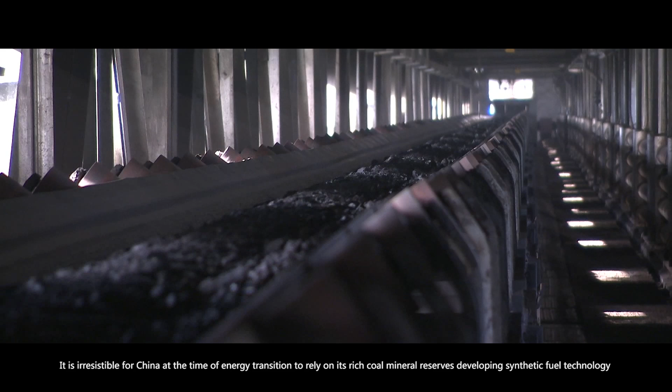It is irresistible for China, at the time of energy transition, to rely on its rich coal mineral reserves, developing synthetic fuel technology which utilizes carbon resources like coal or biomass as raw material and then transfers them to replace oil products and chemicals.

Let's trace back to former times. It has been more than 90 years since the invention of Fischer-Tropsch synthesis in 1923.

Large oil companies in the world have been competing in research on making fuels through coal, natural gas, and biomass to secure places in the international synthetic fuel market in the next 50 years or more.

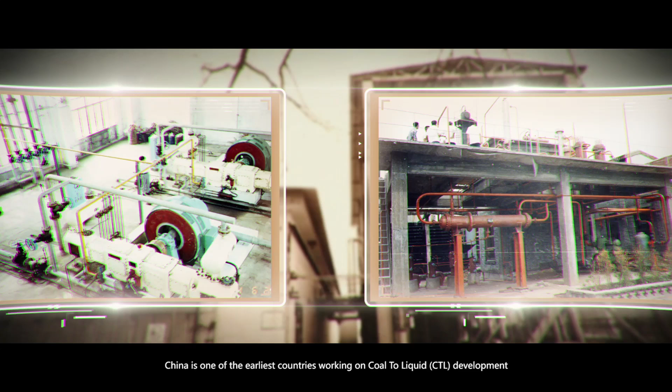With more reserves in coal resources than gas and oil resources, China is one of the earliest countries working on coal-to-liquid development.

However, the CTL has been through a long and hard road due to wars, economy, energy strategy considerations, etc.

How time flies - China ushers in a new century with an energetic rise and growing need for energy. As environmental deterioration increasingly grows in recent years, it is a trend to use coal resources efficiently and eco-friendly.

Confronted with the complicated global energy situation in 2006, China Academy of Sciences, Yitai Group, and 5 other energy companies jointly founded Synfuels China.

It unfolded a new chapter of system innovation of CTL and offered strong support for China's economy and energy security. Synfuels China has become a burgeoning power with proprietary intellectual property in the international CTL field.

Technology is the base, while teamwork is the source of strength. Since the beginning of its establishment, Synfuels China has prioritized technical team building in its strategic development.

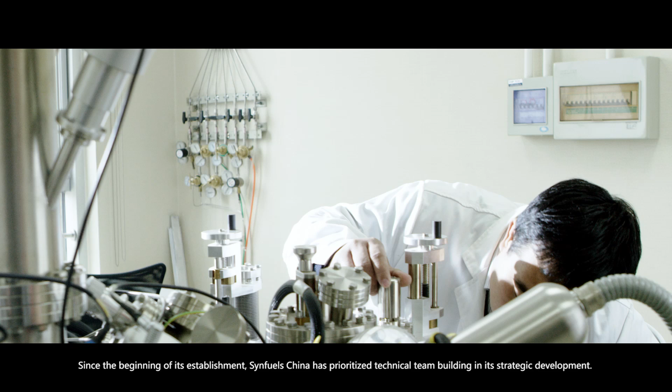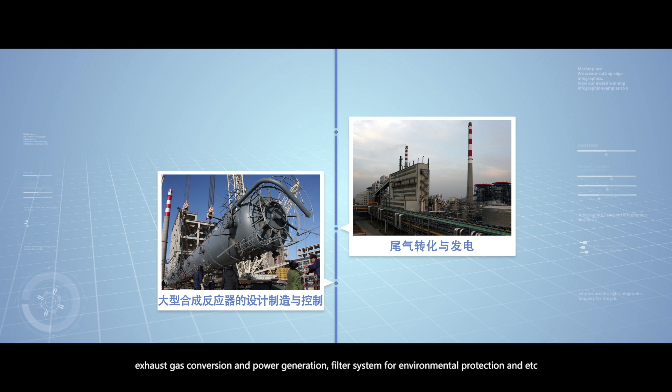Now it has set up a research and development center, which brings more energy to its growth. Indirect coal-to-liquid is a complex and systematic process involving gasification, cleansing, Fischer-Tropsch synthesis, oil processing, and design and control of large-scale synthesis reactors.

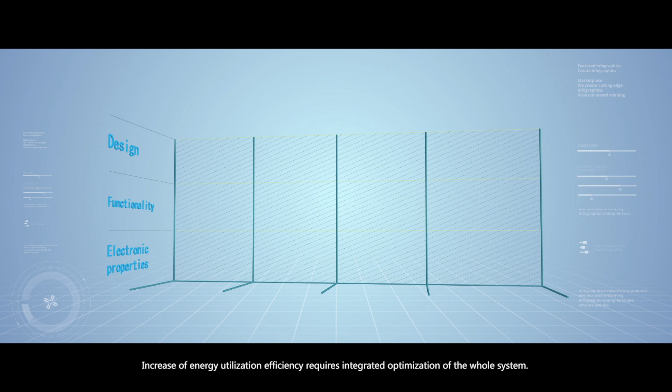It also involves exhaust gas conversion and power generation, filter systems for environmental protection, and etc. Increase of energy utilization efficiency requires integrated optimization of the whole system.

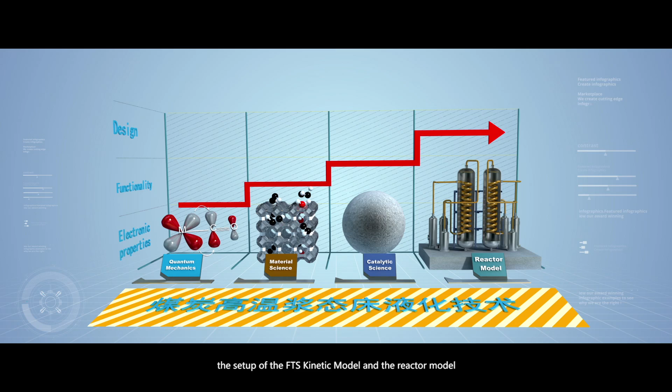It relies on development of high-performance industrial catalysts and knowledge of reaction mechanisms, the setup of the FTS kinetic model and reactor model, as well as the build-up of process simulation software and innovation of synthetic techniques.

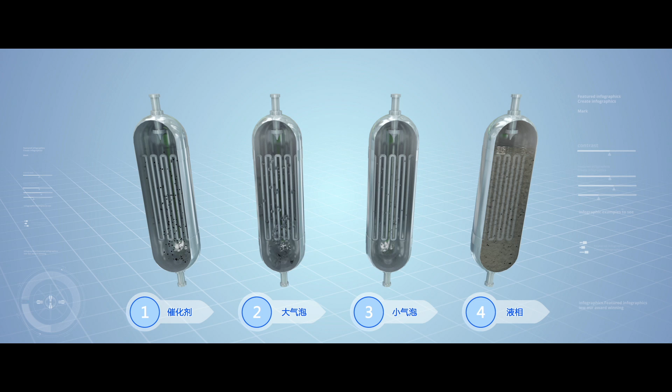First, at the atomic level, using quantum mechanics provides the essential fundamental knowledge for Fischer-Tropsch synthesis and catalytic reaction mechanisms. It predicts and explains the catalyzing process, providing theoretical support.

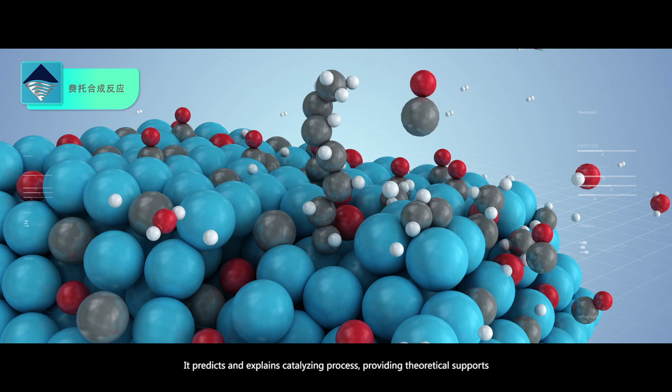Second, make breakthroughs on catalysts for Fischer-Tropsch synthesis, from deep understanding of the structure of the active phase and reaction mechanism, to design more efficient, more active, and highly selective industrial catalysts with longer life cycles.

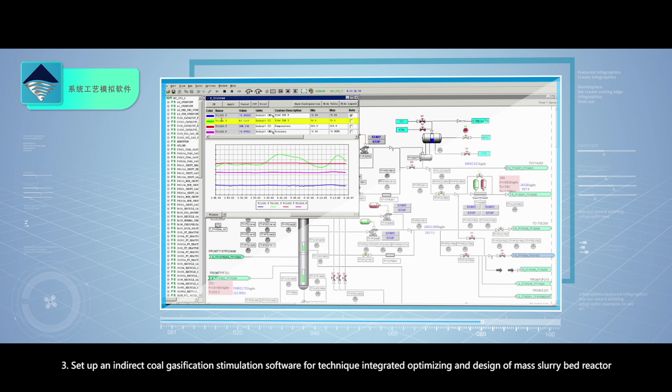Third, set up an indirect coal gasification simulation software for technique-integrated optimizing and design of a mass slurry bed reactor.

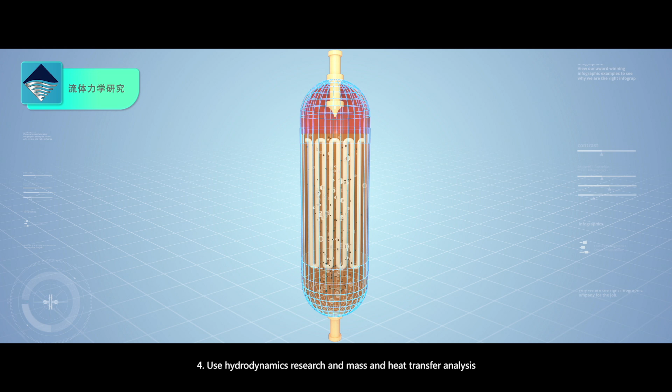Fourth, use hydrodynamics research and mass and heat transfer analysis together with the particle characteristics and anti-wear properties of synthetic catalysts to provide theoretical and statistical support.

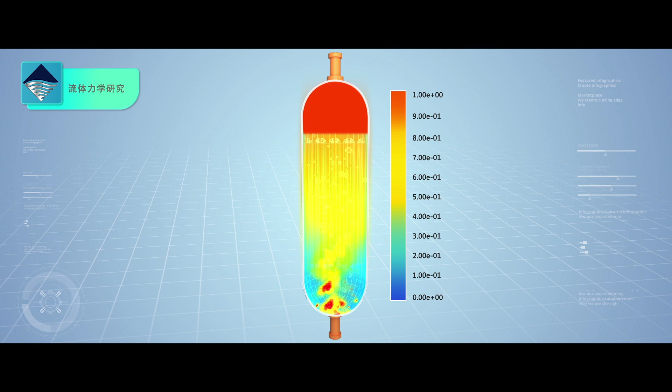Fifth, develop new techniques of catalyst, clean gasoline, fuel, aviation kerosene, lube oil, and high-value chemicals to meet needs of producing plural and high-valuable oil and chemicals.

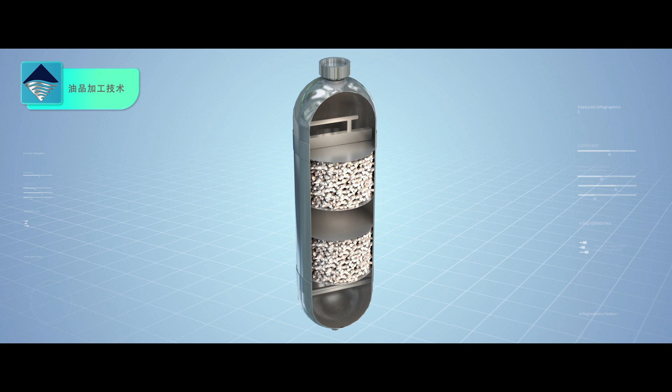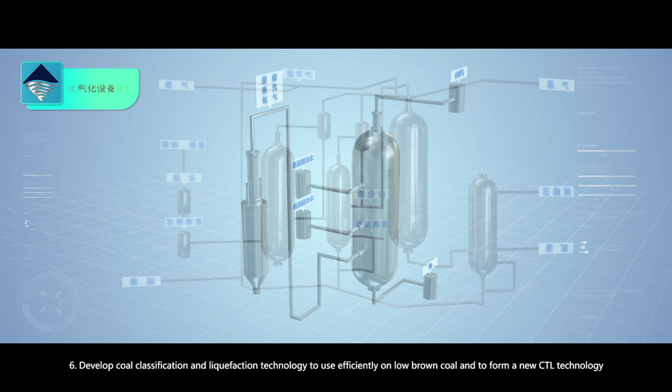Sixth, develop coal classification and liquefaction technology to efficiently use low brown coal and form a new CTL technology. Seventh, improve gasification equipment to develop powder coal conveying pumps and new powder coal gasification furnaces.

Eighth, to improve research and innovation, the founder of Synfuels China, Professor Yongwang Li, established an International Advanced Catalysts and Materials Research Center to provide an international exchange platform, knowledge innovation platform, and talent training platform. It has many sophisticated instruments, including in situ STM, HR transmission electron microscope, in situ XPS, in situ XRD, IR, and Raman. The center was put into use in January 2015.

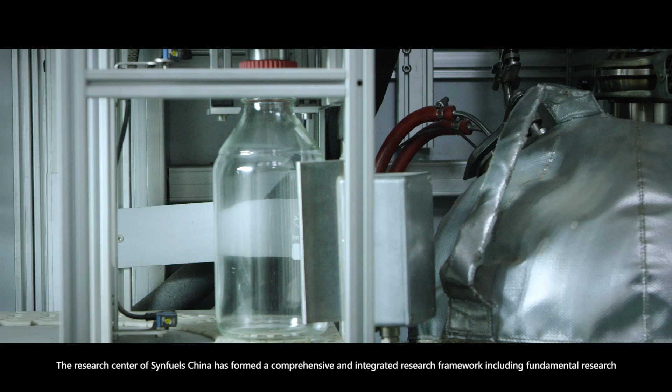The Research Center of Synfuels China has formed a comprehensive and integrated research framework, including fundamental research, oil processing, production technique, and product analysis. Its full technical support system with independent intellectual property rights drives the whole company.

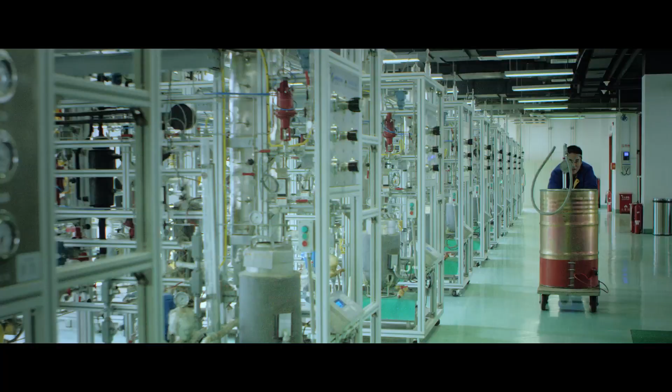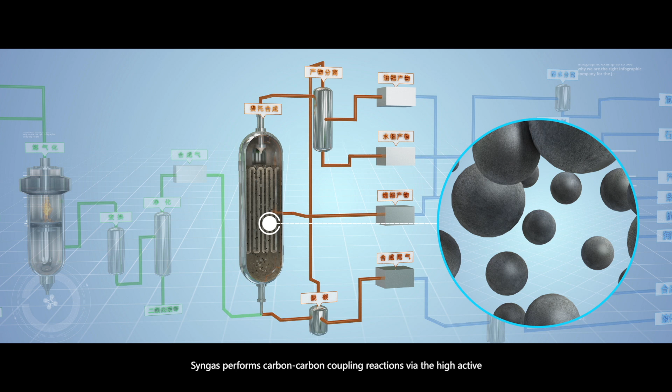The quality of products depends on techniques. Coking coal becomes syngas after gasification, transfer, and cleansing, and is then put into a Fischer-Tropsch synthesis unit. In the slurry bed reactor, syngas performs carbon-carbon coupling reactions via highly active, selective, and wear-resistant Fe-based catalysts.

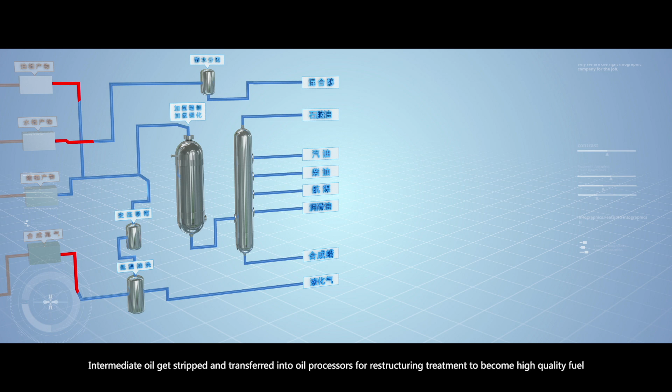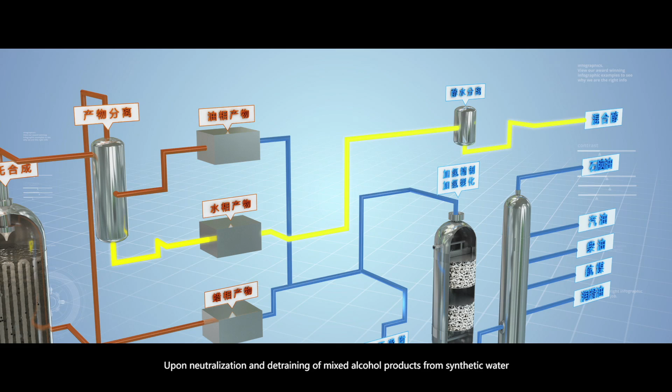Intermediate oil gets stripped and transferred into the oil processor for restructuring treatment to become high-quality fuel: gasoline, aviation kerosene, lube oil, naphtha, LPG, etc. Upon neutralization and detraining, mixed alcohol products from synthetic water are returned to gasification devices for recycling.

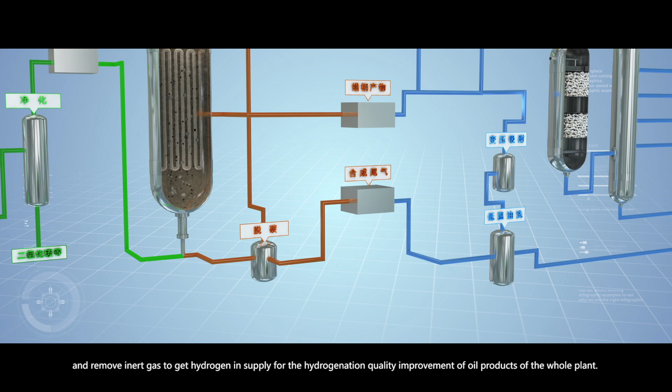Hydrocarbon emissions via decarburization and low-temperature oil washing go into hydrogen plants, where inert gas is removed to get hydrogen supply for the hydrogenation quality improvement of oil products for the whole plant.

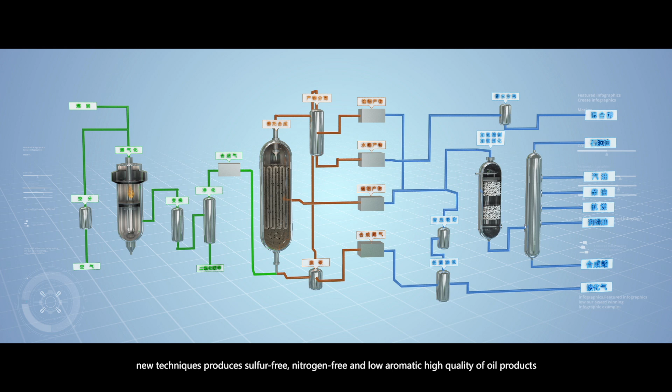By elaborate processing and effective use of coal, new techniques produce sulfur-free, nitrogen-free, and low aromatic high quality oil products, with technical indicators surpassing international standards.

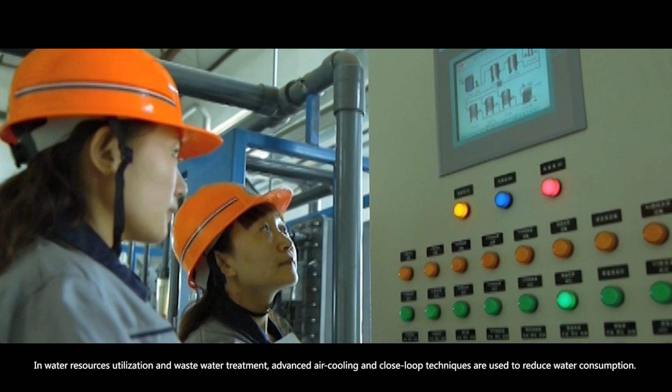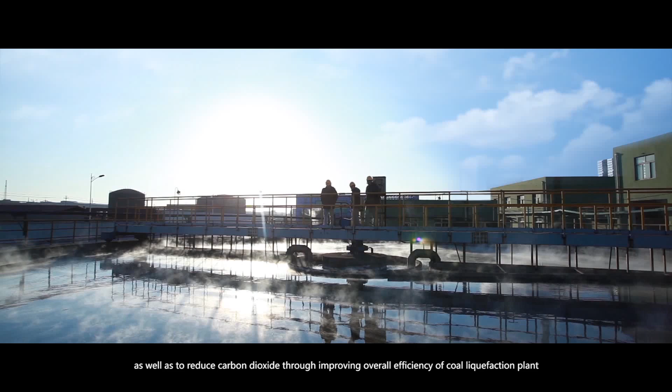In water resources utilization and wastewater treatment, advanced air cooling and closed-loop techniques are used to reduce water consumption. It enforces standard water quality and near-zero emissions, as well as reduces carbon dioxide through improving overall efficiency of a coal liquefaction plant.

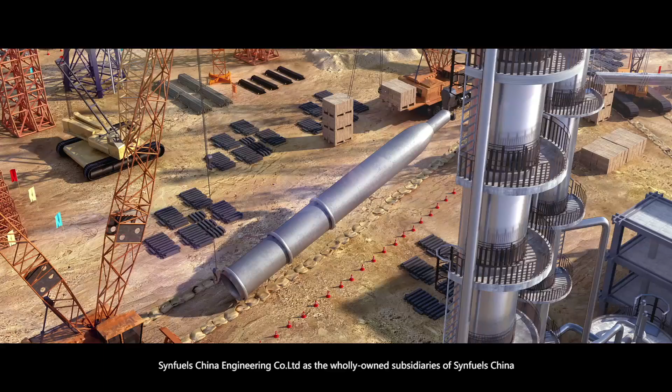Engineering practice and services is essential for technique industrialization. Synfuels China Engineering Company Limited is the wholly owned subsidiary of Synfuels China, has core techniques, and builds a professional team with rich research and design experience.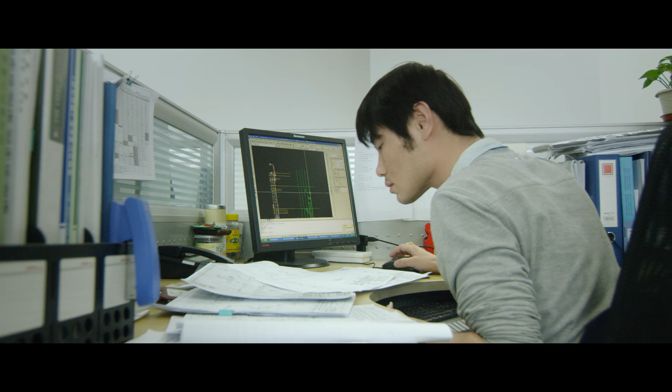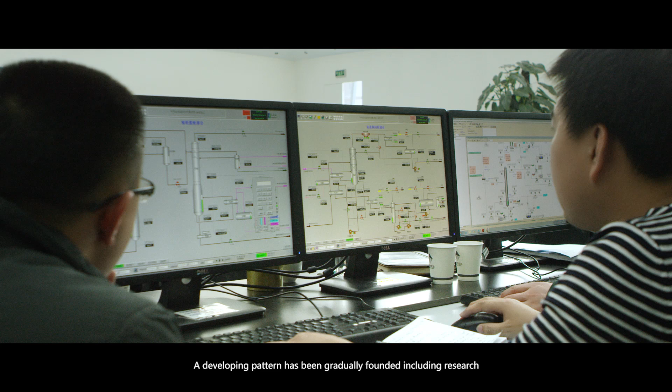Synfuels China is competent in secondary development and process and special equipment. A developing pattern has been gradually founded, including research, techniques, engineering design, and project contracting.

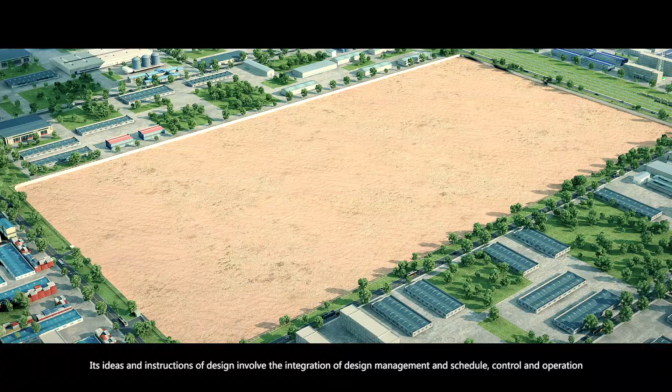It specializes in feasibility study, control simulation system, engineering design, key equipment manufacture, contracting, driving service, and management contract. Its ideas and instructions of design involve the integration of design management and schedule, control and operation, public utilities, and technical standards.

It is devoted to managing risk for biggest opportunities, smallest damages, and largest benefits. It takes building high-quality projects as its long-term target.

Decades of development led to today's success. With technical breakthrough and successful launch of CTL demonstration projects, Synfuels China has been rewarded at home and abroad. Many techniques have earned national scientific progress certifications and surpassed international technical standards.

The coal indirect liquefaction technique represented by Synfuels China has launched construction in Ningxia, Inner Mongolia, Shanxi, Xinjiang, and other provinces. There are 8 CTL plants with millions of tons of production, with total capacity expected to be 13 million tons per year.

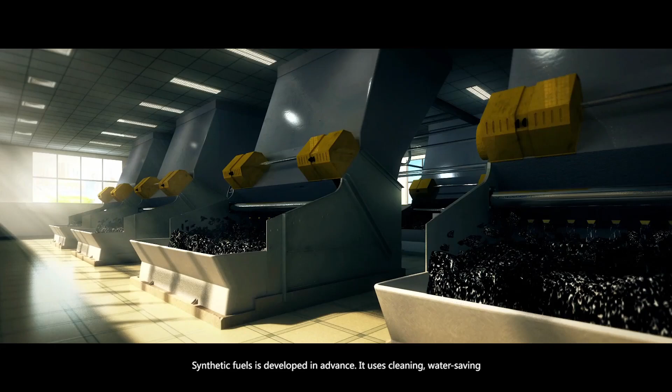It uses cleaning, water-saving, and near-zero emission CTL techniques to produce high quality fuels with no sulfur, no nitrogen, and low aromatic contents, which can reduce particle emissions.

Synfuels China CTL technique supports China's CTL industry and is desired to collaborate with global CTL, GTL, BTL markets. It has also opened a green path on global sustainable energy supply, producing high-quality fuels and chemicals.

Our expertise, our energy, in future.